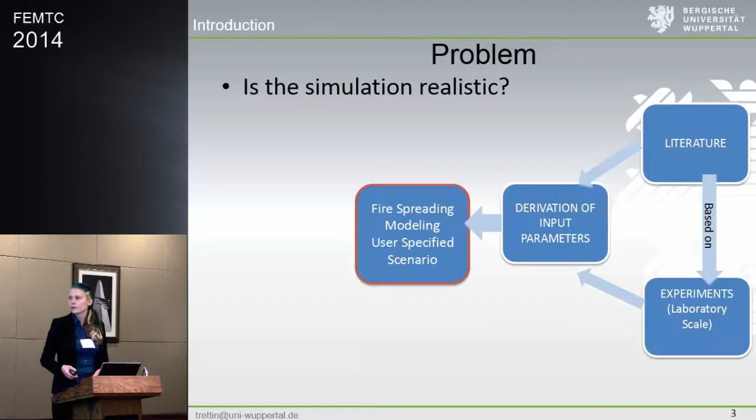Furthermore, the assumptions of the modeling do not necessarily meet the boundary conditions of the specified user conditions. So because of that, the specific user conditions might only in part be in agreement with the model assumption. But today I will focus on the user-dependent influence parameters. So I'll take a look at the fire spreading modeling. The challenge of modeling fire spreading, like reproducing an experiment, is quite popular.

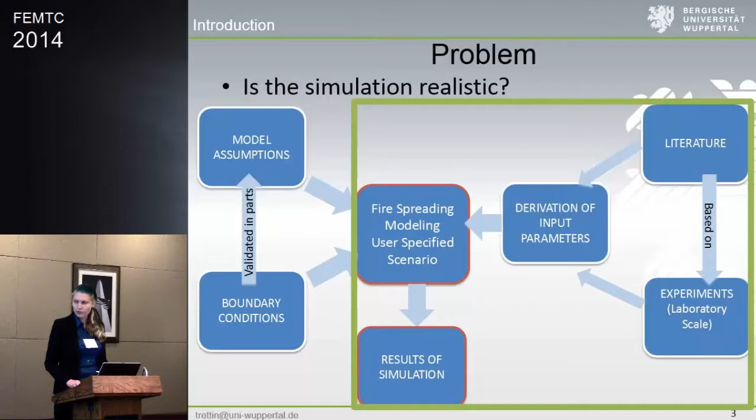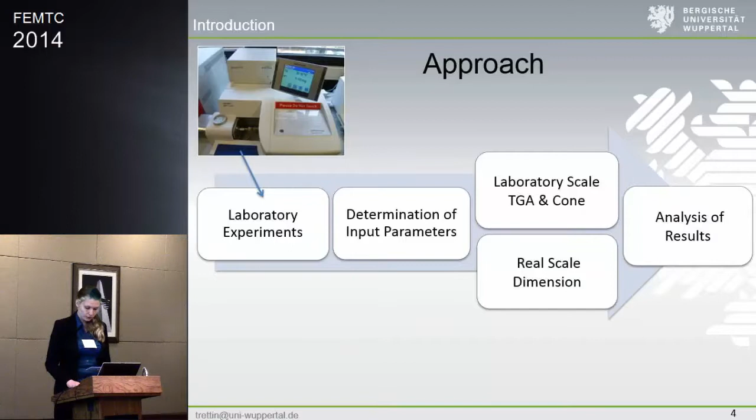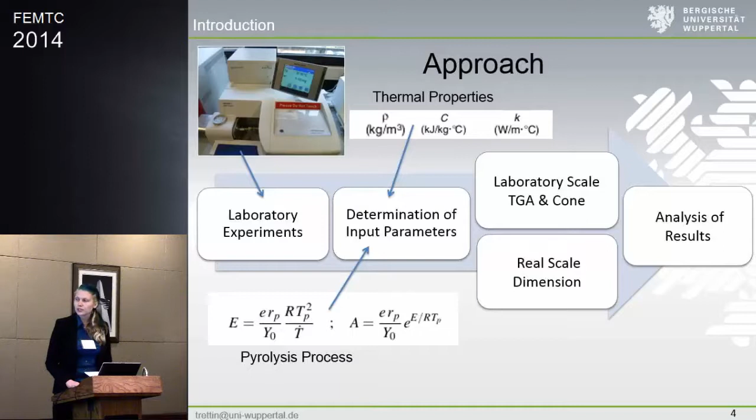So in this work, we at first did some laboratory experiments with the TGA, and with the results of it, we developed input parameters for FDS. These input parameters were implemented in FDS with respect to different experimental conditions. So you see here the simulation part. So I differ between laboratory scale, so it's the TGA or the cone calorimeter, and also the real scale dimension.

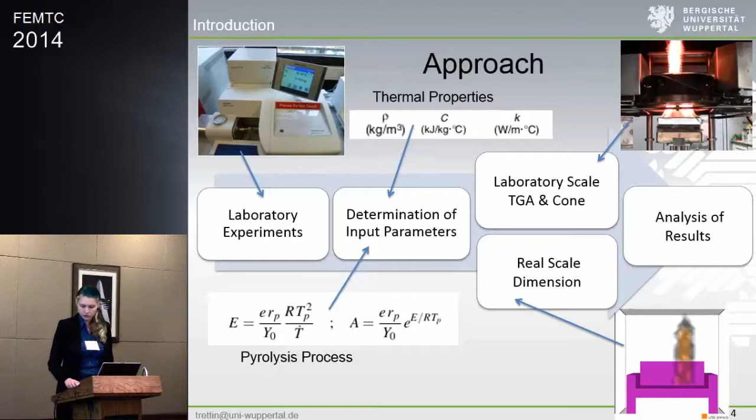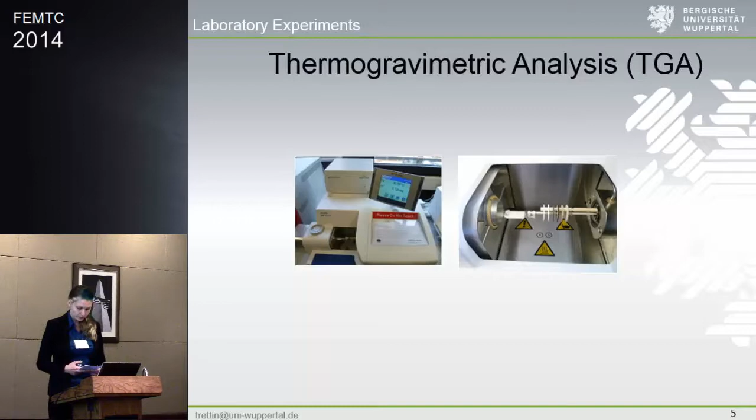So let us see the first step. In the presentation before, you heard a little bit of the TGA, so I shortly summarize. We take different samples which were heated by a determined heating rate. So we're doing this heating process. We're recording the mass loss and the temperature of the sample, also the heat flux. And we vary the heating rate. So we did it with 5 Kelvin per minute and also with 60 Kelvin per minute. And we limited the oxygen concentration from 21% to 10%.

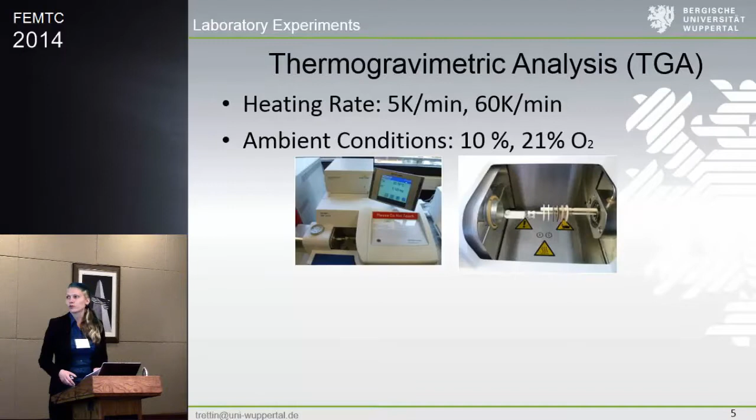So our samples we tested were a Lego brick, so it consists of ABS, a flexible foam, which consists of polyurethane, and also we tested PMMA, black PMMA, and particle board. So polyurethane was crushed, but it's the only one, while the other samples were tested in the initial configuration.

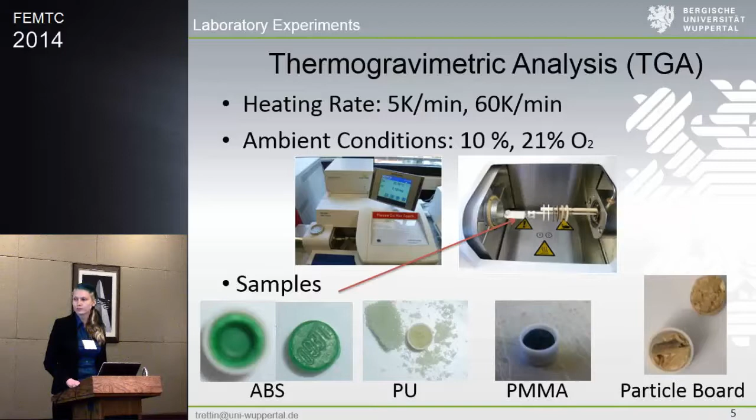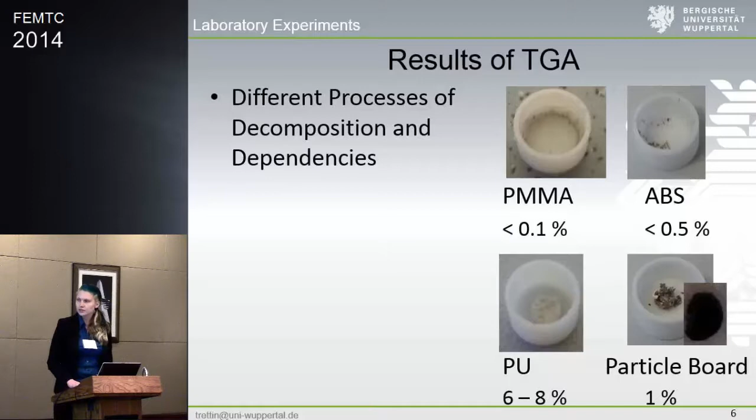So if you have a look at the results of the TGA, different processes of decomposition and dependencies were figured out. So at first we see we have different residues for the thermoplastics. For example, PMMA and ABS, the residues vanish. So we have only 0.1% PMMA residue and 0.5% for ABS. And on the other hand, charring materials like particle board and also polyurethane have a residue between 6 and 8% or 1%. So you see here the two different residues of different heating rates. So one of it was tested with 5 Kelvin per minute and the other one with 60 Kelvin per minute.

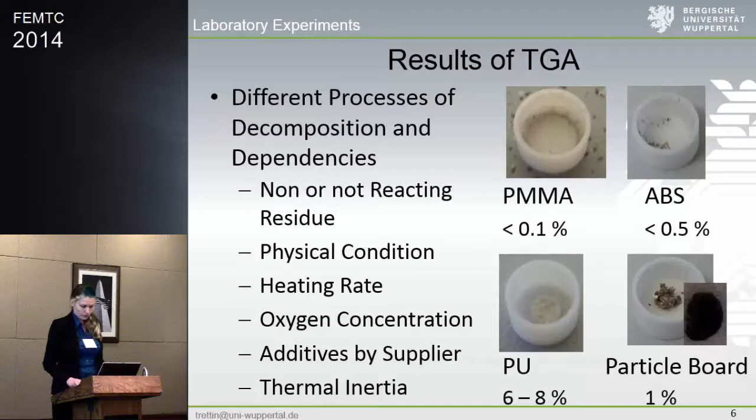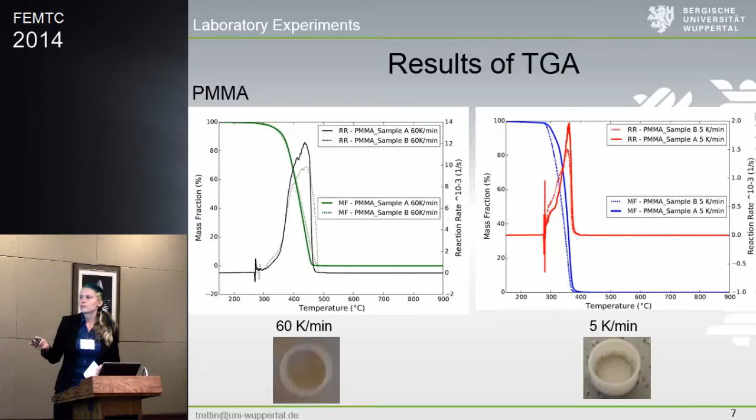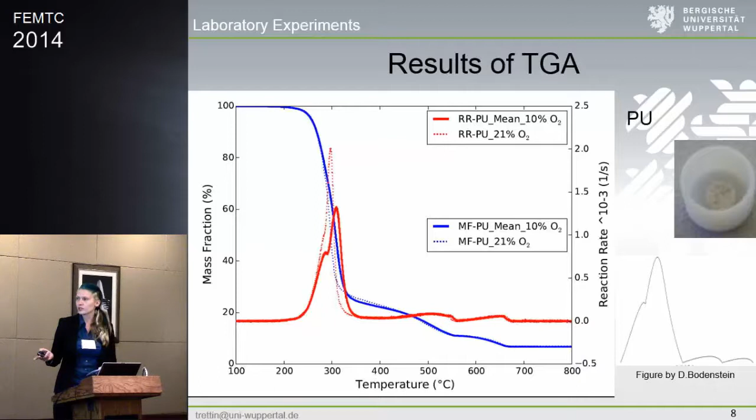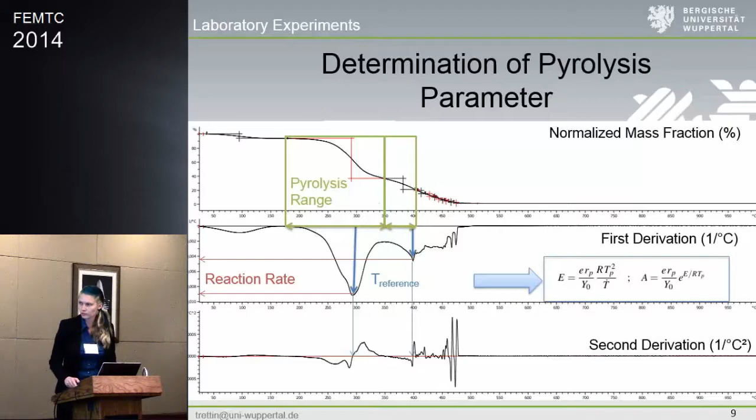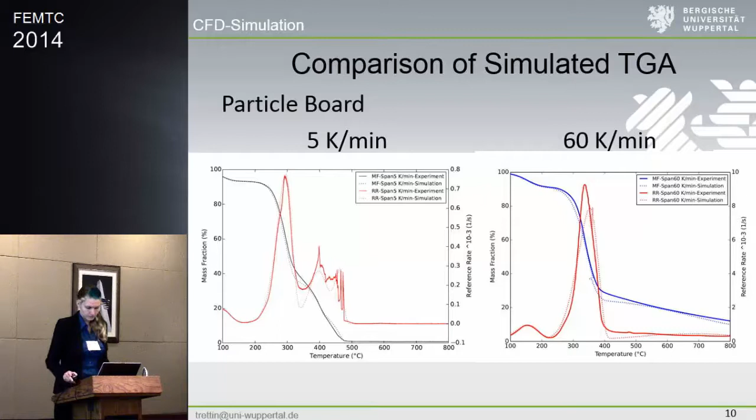So we take this simulation only to focus on the pyrolysis parameters. That's why we made some boundary assumptions. We don't take into account the combustion, by reducing the oxygen concentration, and also the thermal properties were neglected because the sample was very, very thin and the heat coefficient was very high to guarantee a homogeneous heating. This model is based on the TGA example of the FDS user guide, and we take it as a guarantee that we get the right Arrhenius parameters to simulate the following simulation, like the cone experiment.

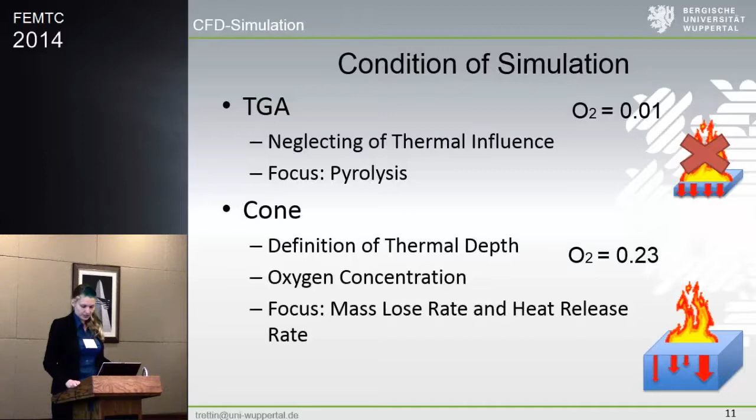For the cone experiment, we define the thermal properties. So the thermal properties are now necessary and have an influence on the simulation, like the density or the conductivity or the heat capacity. And we focus for this simulation on the mass loss rate and the heat release rate. So we're taking the determined Arrhenius parameters and put them in the cone simulation to compare with real experiments of the cone calorimeter.

So you see the particle board. It's different from the typical method of ISO 5660 because we conducted it without the frame. We did it because in this way, the whole surface of the sample gets enough supply of oxygen, and the combustion begins all over the surface and the edges are not excluded.

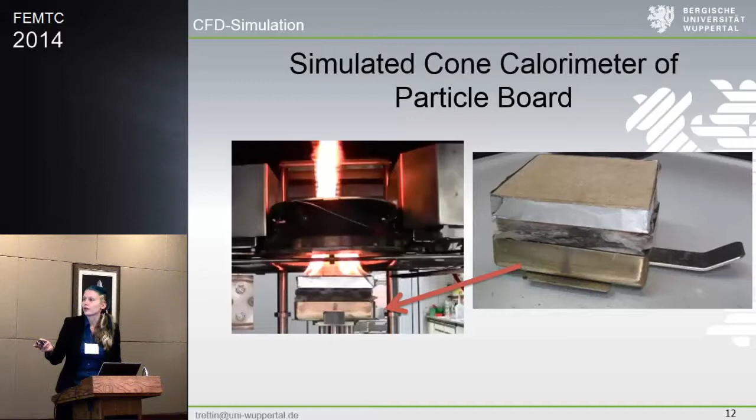So we see here on the left side the experiments of the cone calorimeter with Arrhenius parameters from 60 Kelvin per minute, and here was 5 Kelvin per minute. On the right axis you have the heat release rate, on the left the burning rate. The continuous lines are the experiments, and we have here the simulation. So you can see it doesn't really fit.

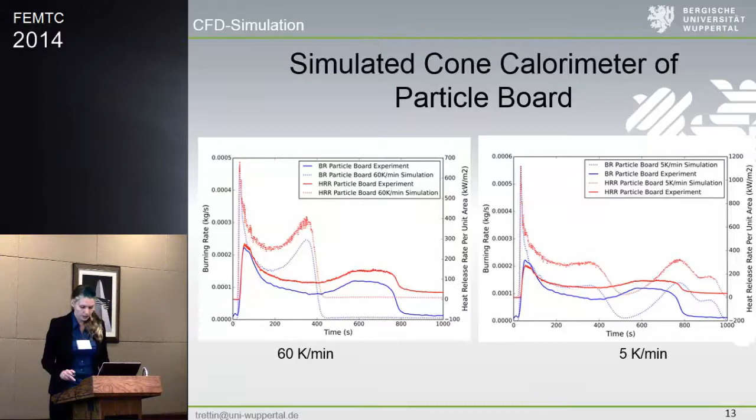So the tendency is the same like here, but it's shortly. And also we've seen it here for 5 Kelvin. So Arrhenius parameters, they're also not fitted. So independently of the Arrhenius parameter, I've added some material properties for the charring process. Otherwise, to simulate the cone calorimeter for particle board is not possible.

So very simple, PMMA, you already saw it, but PMMA is very simple in its behavior of burning. It burns continuously, and so we have the possibility to implement the Arrhenius parameter directly in the cone simulation. And this is the result of 60 Kelvin per minute, so it fits very well. This little difference should be no problem, because you can adapt the thermal properties.

So here, maybe you can remember at the beginning, in the first lower temperature, we have little reactions. So these little reactions were also implemented for the simulation. Because of that, we have here a result which doesn't fit. But if we reduce these 3 reaction steps to 1 reaction step, we also get the same plot. So the difference is only for 60 Kelvin. The TGA experiments show us only one reaction. For 5 Kelvin, 3 reactions.

So the user should know how the material works to define the real number of reactions which is necessary to simulate it, and also to understand the differences.

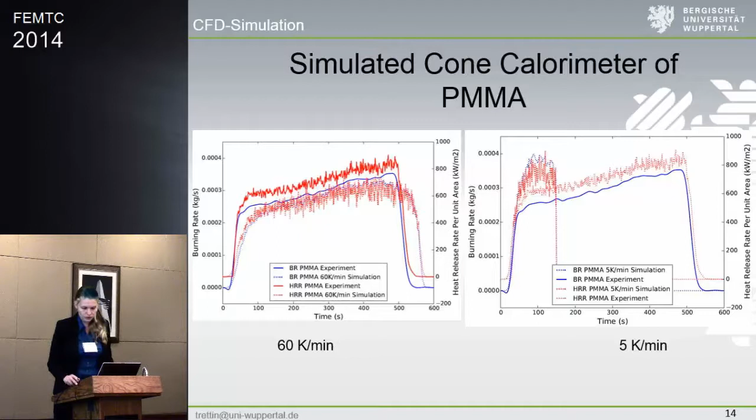So we take the Arrhenius parameter, which we also take for the cone calorimeter, and implement it for a virtual real scale dimension. So it's only an example. This chair consists of particle board. We have the Arrhenius parameter for 5 Kelvin and for 60 Kelvin. So the fire spreading is faster for 60 Kelvin, and also the heat release rate is higher. So you see here the peak, 500 kilowatts for the lower heating rate and 700 kilowatts for the higher heating rate.

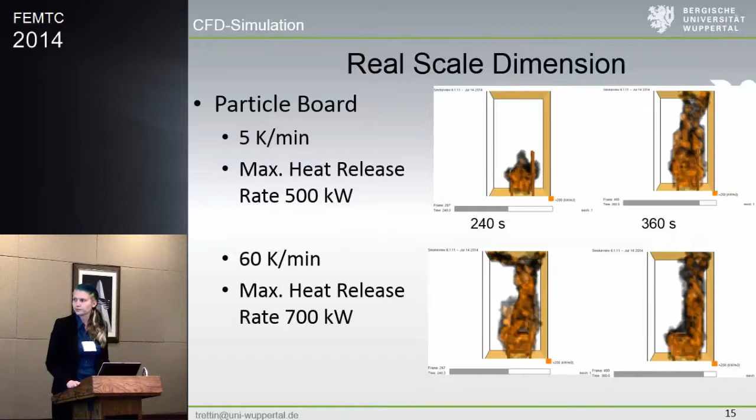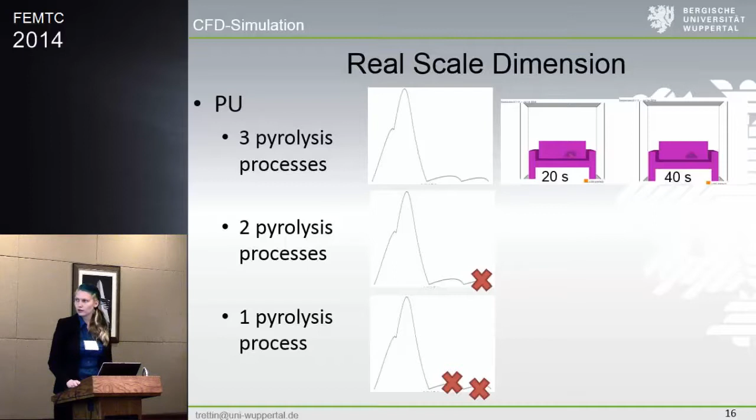Another example is a polyurethane. So maybe you remember the sketch. So we have our pyrolysis processes, and we reduce these 3 pyrolysis processes to 1. And we can see here that we have a very fast fire spreading, and a complete fire spreading for only 1 reaction, and for 2 and 3 reactions, we have a delayed fire spreading.

So why could it happen? It's very simple. If you reduce the reaction numbers, you also reduce the heat of reaction, and the energy which doesn't get lost could be used for the combustion. So that's why for only one reaction, you have more energy for the combustion.

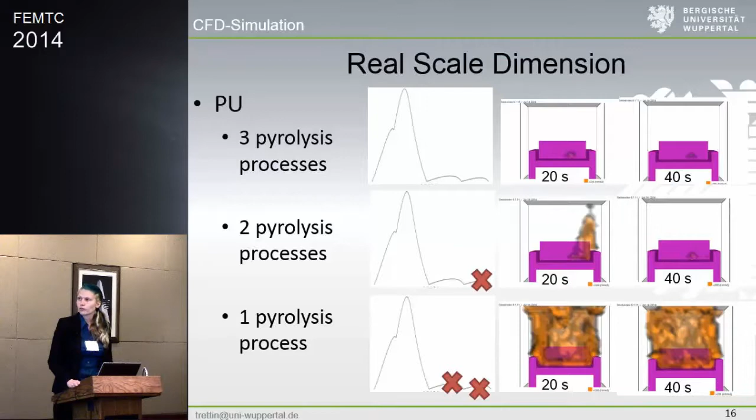So, in total, with all the simulations and experiments, it is clear that the transfer of material properties from one scale to another scale is limited, and also that modeling the fire scenario by adjusting only one parameter could end in a worst case scenario. So we see it with the sofa or also with the chair. For experiments, one change in configuration, like the oxygen concentration or the heating, could lead to a complete change in fire behavior, and also the Arrhenius parameter or the input parameters will change.

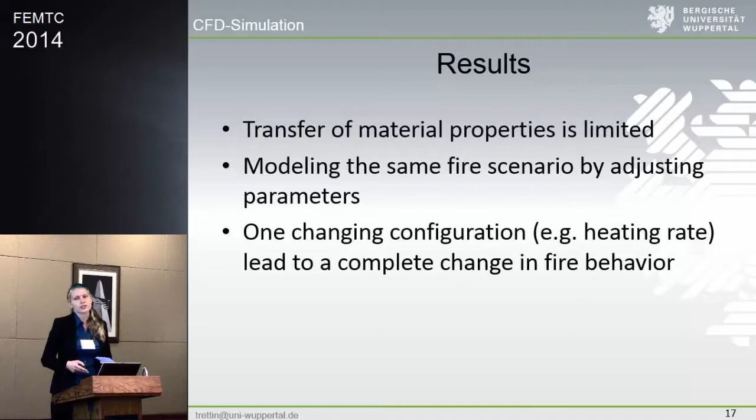So what's our conclusion? The user has to determine the input parameters for his specific fire scenario because they are very sensitive, and the modeling procedure has to be clarified, transparent, and documented. Also, the definition of material properties, especially in literature.

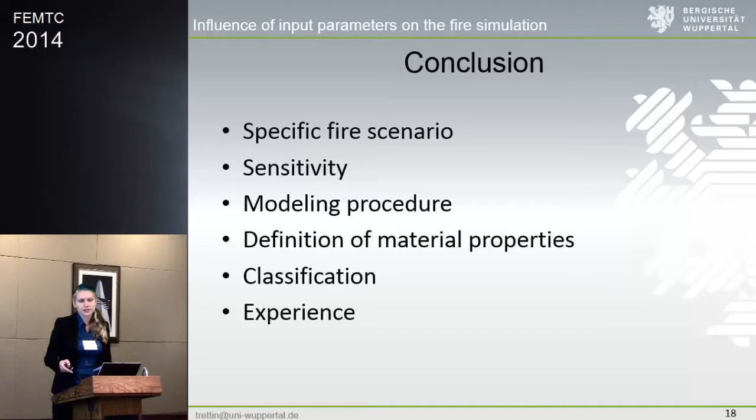So we also see that a classification could maybe help for the materials: simple burning behavior like PMMA, or a melting process, or a charring process. So we just have to implement some additional material properties or material layers. And also, independent of all these facts, the user needs a lot of experience to choose the right and realistic input parameters for the FDS simulation. So I'm finished now.

We have time for a couple questions here. So, Kevin, I'm going to ask you. I've never done pyrolysis. Is this the way we're heading in general now, to do pyrolysis, that eventually you're hoping there will be data for the different materials, and we will then have those parameters that we use? Although I noticed you also commented you thought maybe she didn't have fabric on the sofa?

Yeah, well, you'll notice the last two talks, basically PhD theses. This is typical like a PhD thesis, and how long did this work take you? Not long. What's not long? Say 2 years, 3 years? Like 4 months. 4 months. Okay.

So my goal is that you could take a chunk of this carpet, go to a testing lab, say run test A, B, and C, let's say TGA, DSC, MCC, and do this kind of analysis that she described and that the previous speaker described in a day or two. Otherwise, this isn't practical.